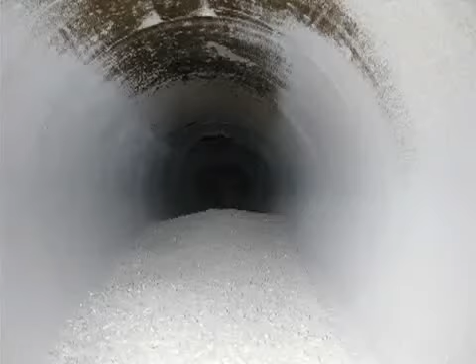Combustible dust fires and explosions continue to occur frequently, fueled by accumulations of combustible dust, which can gather over years in hidden places or in plain sight.

No company wants to see its facility blown up and destroyed and its employees killed, but they just don't understand what the hazard is. They don't realize that they have a hazard here until that one day when the explosion occurs, and it's a terrible tragedy for them. And they look back and say, if we'd only known.

When Tammy Miser got a phone call late one evening in 2003, she worried it would be about her brother, Sean Boone, who worked at an automotive parts factory. We usually didn't answer the phone that late, but we knew when it kept ringing that there was something wrong, so we answered it.

There had been an accident there before, so I knew. I knew if they were calling me, it was my brother.

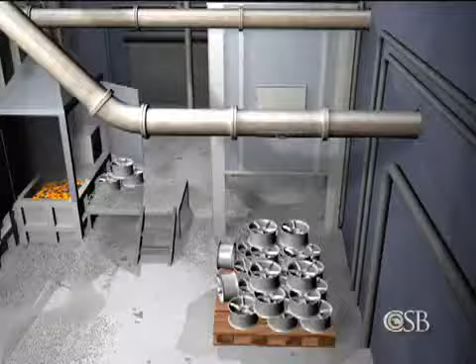Sean Boone was a mechanic at the Hayes Lemmerz plant in Huntington, Indiana. The company produced aluminum car wheels. The process of finishing the wheels left behind aluminum scraps, which were chopped into small pieces and sent to a furnace to be melted and reused.

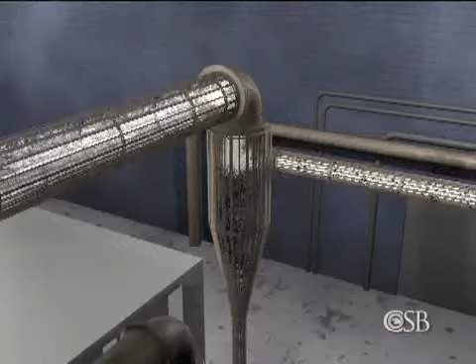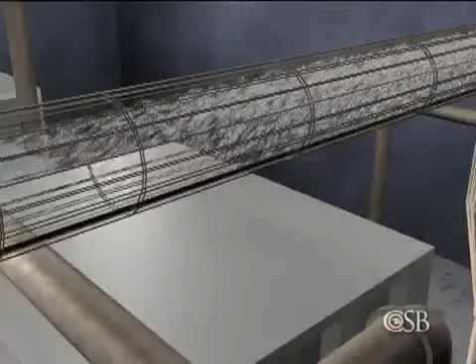Chopping, drying, and blowing the dry chips through the transfer piping created highly combustible aluminum dust, which flowed through ducting to a steel drop box outside the building, where large particles were trapped. The air then entered a dust collector, which removed finer aluminum particles. Over time, aluminum dust accumulated inside ducts.

In addition, there were leaks in the piping used to transfer aluminum chips, which caused dust to build up on surfaces throughout the furnace area. Aluminum dust landed on beams, ledges, and equipment. In some places, the dust was several inches deep.

On the night of October 29th, about 10 minutes after workers started the aluminum chip melting process, aluminum dust inside the dust collector was suddenly ignited, perhaps by a metal ember or impact spark, resulting in a large explosion.

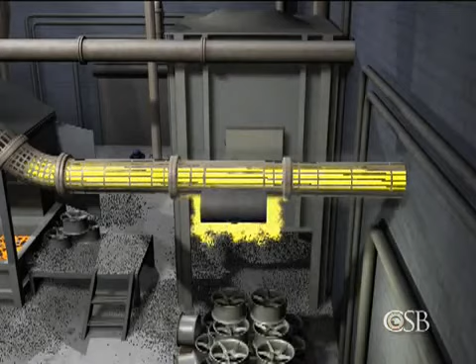The blast propagated back through the duct into the steel drop box, blowing it apart. The fireball and pressure wave continued back through the duct system into the building, gaining intensity as the accumulated aluminum dust ignited.

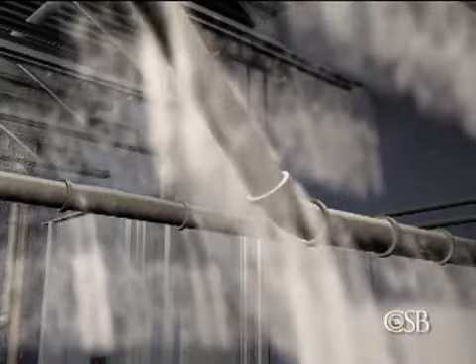The violent disturbance shook loose dust that had built up on external surfaces. At about 8:30 p.m., plant mechanic Sean Boone was one of several workers in the area of the furnace. Without warning, a fireball erupted from the furnace, engulfing the area and igniting airborne dust in a second, larger explosion. The explosion blew a 50-foot wide hole through the roof of the building.

Co-workers found Sean Boone lying on the floor near the furnace, gravely injured. He was rushed to the hospital and put on life support.

And they told us that his internal organs were burnt, and they could take his arms, and they could take his legs, but he probably wouldn't make it, and it would just prolong it, so we went ahead and took him off.

Sean Boone was one of 14 dust explosion fatalities in 2003 alone.

Launching a comprehensive investigation into the hazard, the CSB held 2 public meetings, convening panels of experts and listening to extensive public comment. First, combustible dust is a real serious problem in all of general industry.

The CSB report concluded that good engineering and safety practices to prevent dust explosions have existed for decades, but there is no comprehensive federal standard requiring adherence to those practices.

Many companies are not taking effective actions to control dust hazards. As a result, the board recommended increased regulation of dust hazards. The final report was approved at a public meeting in Washington in November 2006, and the report and recommendations were adopted.

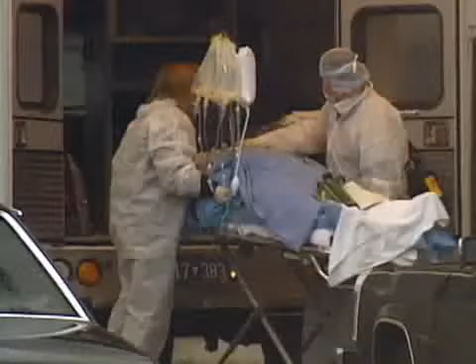Resin dust exploded at the Jahn Foundry in Springfield, Massachusetts in 1999, killing 3 workers and injuring 9 others. Rubber dust exploded at Rouse Polymerics in Vicksburg, Mississippi in 2002, leaving 5 dead. A nylon fiber explosion destroyed Malden Mills in Methuen, Massachusetts in 1995.

In fact, between 1980 and 2005, the CSB found at least 281 combustible dust fires and explosions that caused 119 deaths, 718 injuries, and major damage to industrial facilities.

Amy Beasley Spencer is a combustible dust expert at the National Fire Protection Association, or NFPA. Beyond the loss of life and the injuries, when you think about the economic impact of a dust explosion, you hear about plants being completely destroyed. There's loss of jobs. It's an economic impact on the entire community.

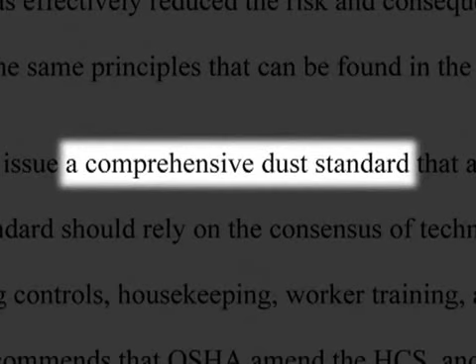The CSB report called on OSHA to establish a comprehensive regulatory standard designed to prevent dust explosions in general industry. The board said OSHA should base the new regulation on the current standards of the NFPA. These codes address hazard assessment, engineering controls, housekeeping, building design, explosion protection, operating procedures, and worker training.

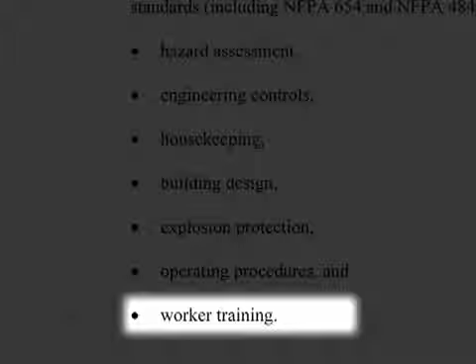The NFPA codes and standards have been in existence since the early 1920s, and there are 7 codes and standards that deal directly with dust. It's a tragedy to have even one loss of life because the technology is out there to prevent these dust explosions. In addition to the NFPA, the Center for Chemical Process Safety, as well as a leading insurance company, have developed recommended practices on controlling combustible dust.

The board also called for improved training of OSHA inspectors to recognize dust hazards. Interim CSB Executive William Wright explained the recommendation before the House Committee on Education and Labor in March 2008, citing 3 dust explosions the CSB had investigated in 2003.

State OSHA officers had inspected all 3 facilities prior to the accidents, but the dust hazards were never recognized or cited. Furthermore, the CSB determined that all 3 explosions could likely have been prevented if the facilities had implemented NFPA recommended practices.

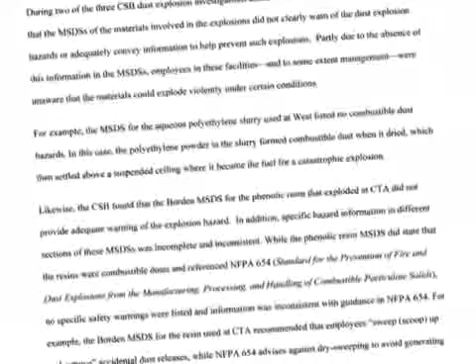In addition, the board recommended that OSHA revise its hazard communication standard to ensure that material safety data sheets better communicate dust hazards to workers.

In response to the CSB's recommendations, in 2007, OSHA increased the enforcement of existing regulations through a new national emphasis program on combustible dust. Without a comprehensive standard for combustible dust, it's difficult for businesses to know which specific NFPA provisions or other requirements they may be subjected to.

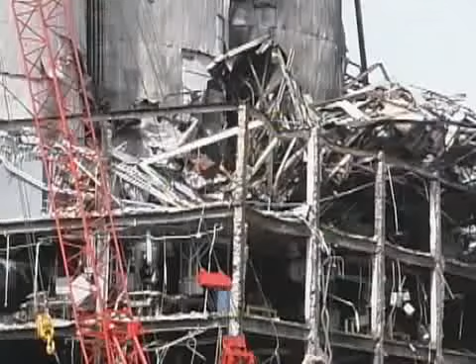The explosions tragically continue. The list includes the blast that crippled the Imperial sugar refinery outside Savannah, Georgia, in February 2008. Since 2005, about 70 additional dust explosions have been reported. In fact, the Imperial accident last month is the deadliest industrial dust explosion in the United States since 1980.

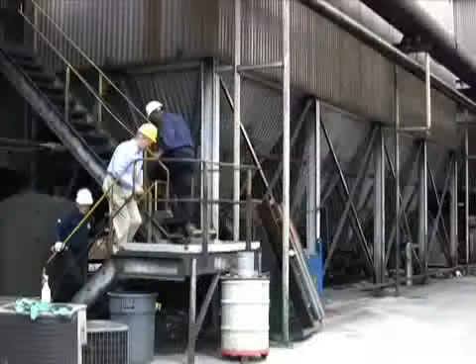CSB Chairman John Bresland: I toured the facility about 6 weeks after the explosion. The damage that was done there was catastrophic. As you walk around the facility, you think of the people who were working there that day, who were killed and severely injured. It was a difficult experience to walk around that facility. It was a very sobering experience.

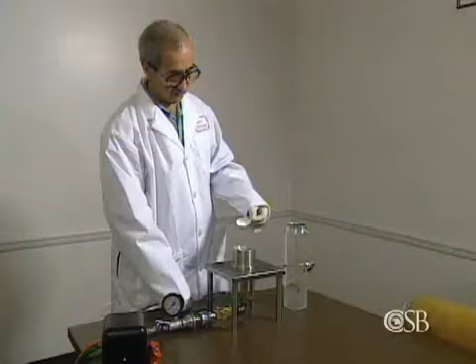What is so frustrating about dust explosions is that they're so preventable. And I believe that one of the reasons that dust explosions continue to occur may simply be a lack of understanding about the materials. Most solid organic materials will explode if the particles are small enough and they're dispersed in a sufficient concentration.

Some of the materials that could form combustible dust, and there are lots of them, could include coal, sawdust, food products like sugar and flour, pharmaceuticals, many chemicals, and even many metals. Like all fires, a dust fire requires fuel, oxygen, and an ignition source. A dust explosion requires two additional elements: dispersion and confinement.

The CSB commissioned laboratory tests using a sample of fine polyethylene dust found by investigators in the rubble of a North Carolina factory. Dust is dispersed into a flame, creating a fireball.

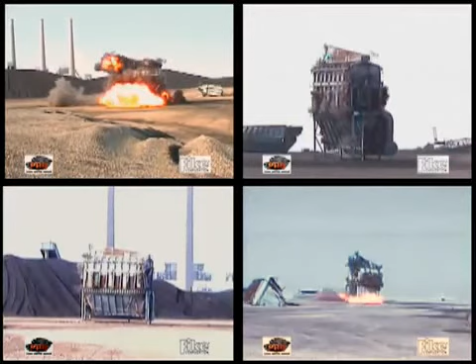When the dust is confined within a structure or a piece of equipment, a powerful explosion can occur and propagate, as this coal industry video demonstrates.

Dust may accumulate on surfaces and lie undisturbed for years. Then some initial fire or explosion, known as a primary event, shakes it loose and ignites it. It causes a pressure wave to go through the plant, and that dislodges all of the dust that is perhaps unknown up on the rafters, on the beams, on the tops of equipment, and that serves as the fuel for the secondary explosions that move through the plant. Most of the fatalities and the devastating injuries have been caused by these secondary dust explosions.

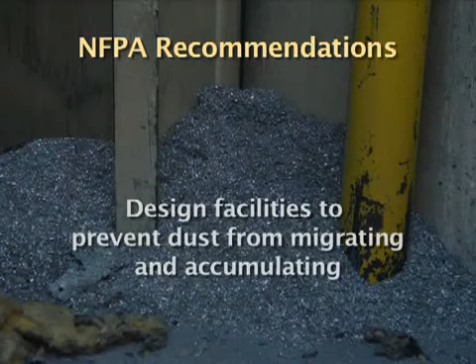According to the NFPA, a catastrophic explosion can occur from as little as 1/32 of an inch of accumulated dust, around the thickness of a dime, covering just 5% of a room's surface area. The NFPA therefore recommends that companies control fugitive dust emissions, design facilities to prevent dust from migrating and accumulating, and perform rigorous housekeeping to remove any dust that does build up.

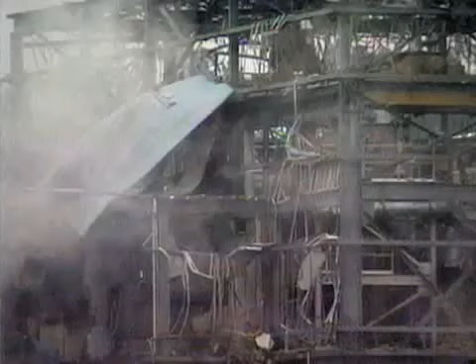The NFPA codes have been adopted either at the state level or in some cases at the local level, at the city level. But the problem is they're not enforced in any regular way.

A catastrophic dust explosion at the West Pharmaceutical plant in Kinston, North Carolina in 2003 reveals what can happen when companies do not properly assess the hazards from combustible powders and do not design their buildings and equipment appropriately.

West Pharmaceutical made small rubber medical products, such as syringe plungers and stoppers, at a large manufacturing facility with nearly 300 workers. In the process, large batches of rubber were compounded and rolled into long strips.

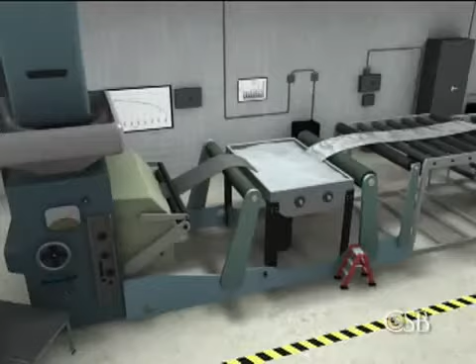To keep these strips from sticking together, they were dipped in a vat containing a whitish slurry of water and finely powdered polyethylene, a petroleum-based wax-like plastic. The coated rubber strips were then blown dry with fans and folded for later processing.

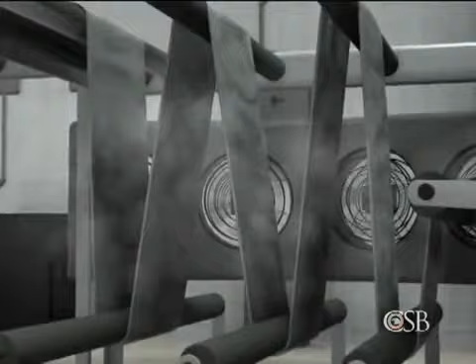As the rubber sheets dried, combustible polyethylene dust, which was not visible to workers but is colored white here for illustration, was blown into the air.

Over the years, the air conditioning system drew polyethylene dust into the hidden space above an acoustic tile ceiling that was suspended over the production area. There, the dust gradually built up to a thickness of up to 1/2 inch on ceiling tiles, beams, conduits, and light fixtures, just a few feet over the heads of unsuspecting workers.

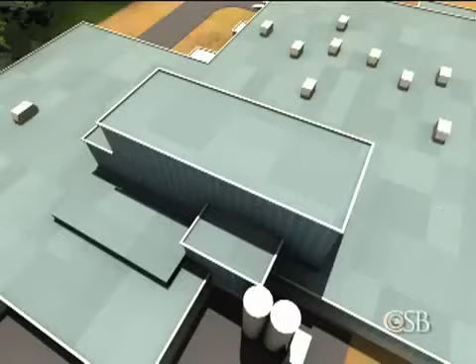January 29th began as a routine workday at the West plant. But at about 1:28 p.m., a small fire or explosion occurred somewhere near the production area.

It lofted the accumulated dust above the ceiling into a thick cloud, which then ignited in a much more violent secondary explosion.

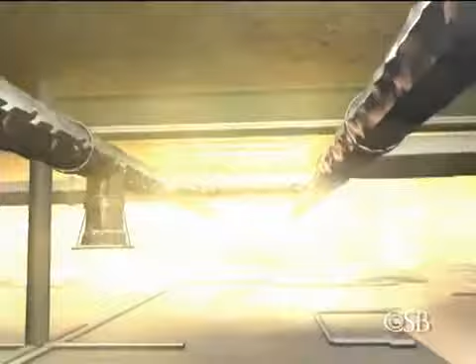Some employees described a sound like rolling thunder as the dust explosion spread throughout the space above the ceiling and ripped through the building. The accident at West Pharmaceutical Services took the lives of 6 employees and injured 38 others, including 2 firefighters.

The thing that set up the tragedy at West was the mere accumulation of hazardous dust above a ceiling. The NFPA code says that any openings where dust could accumulate must be sealed. The solution would have been to either seal it or to not have a suspended ceiling.

Another cause of the West accident was that workers were not informed of the dust explosion hazard arising from the polyethylene slurry, a fact that should have been included on the material safety data sheet.

At West Pharmaceutical, the dust wasn't well recognized as a hazard because it was actually in a slurry form. So the actual processing of the slurry, the drying of it, created the dust, and the dust migrated above the suspended ceiling. Cleaning above the ceiling was overlooked in West's otherwise rigorous housekeeping program.

Cleanliness was a matter of pride for the West staff. Being in the pharmaceutical services industry, they kept the production area very, very clean.

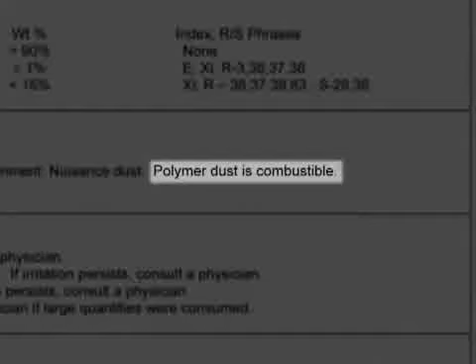The CSB found that the problem of inadequate MSDSs is widespread. Of 140 MSDSs for combustible powders, the CSB found that very few included adequate dust explosion warnings or referred readers to the appropriate NFPA standards. There needs to be better communication to workers on the issue of combustible dusts, and that should be done through improved information on material safety data sheets.

Less than a month after the West Pharmaceutical accident, a fatal dust explosion crippled the CTA Acoustics plant in Corbin, Kentucky. The disaster at CTA, which claimed 7 lives, illustrates the critical importance of following NFPA recommended practices to control dust hazards.

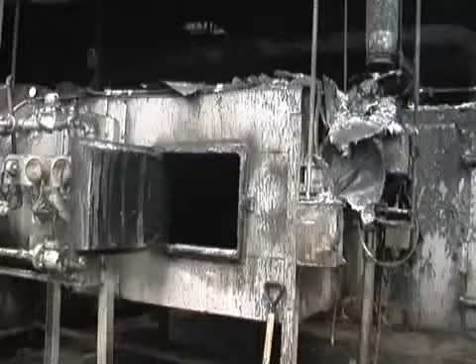The CTA facility, with more than 500 personnel, produced fiberglass acoustic insulation for automobiles. Covering 300,000 square feet, it had 5 production lines. At line 405, fiberglass was fed along a conveyor system and spread to create a web.

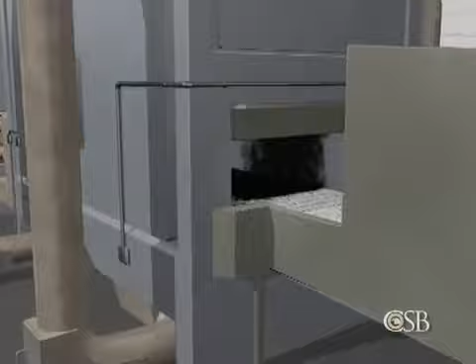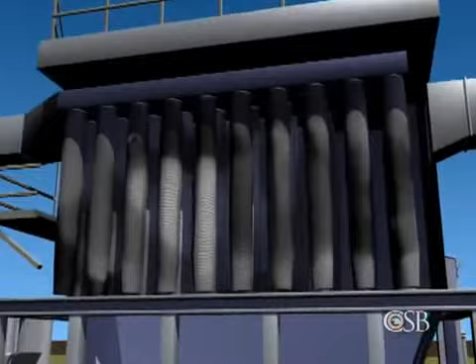Black phenolic resin powder was deposited onto the fiberglass. Hundreds of thousands of pounds of the combustible resin powder were used in the plant every month. Next, the mat former used air suction to spread the resin through the fiberglass. Excess powder and fibers were drawn up into a dust collector and rapidly accumulated on long cloth bags. After the mat former, a nylon facing was rolled onto the fiberglass before it entered a gas-heated curing oven.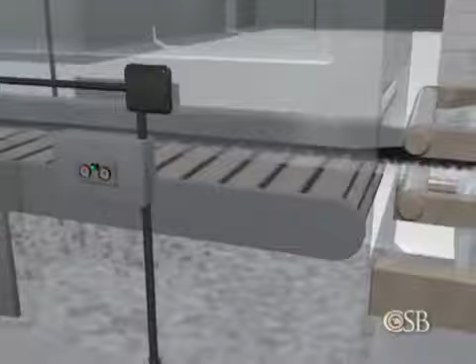Combustible resin accumulated in the oven, resulting in frequent small fires that were extinguished by workers. During each shift, the line was shut down for cleaning.

On the roof, employees routinely used compressed air to dislodge dust that had built up in the ductwork, dumping the material into a large open box on the production floor.

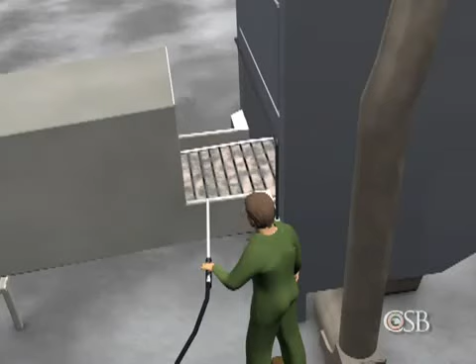On the production line, workers also used compressed air to blow dust off equipment. They swept the production floor with brooms. These cleaning activities created dust clouds so dense that large fans were used to blow the dust away from the operators. This increased the dispersion of dust in the plant.

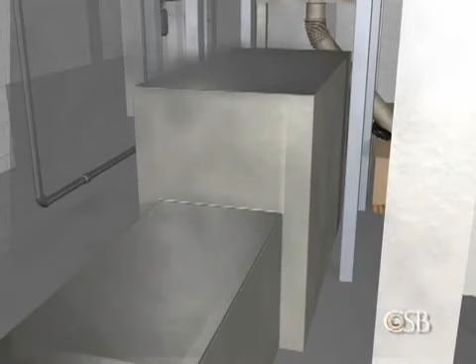The dust settled on horizontal surfaces throughout the entire production area. Over years of operation, dust built up on top of pipes, electrical conduits, and other hard-to-clean elevated surfaces such as roof trusses. A pile of resin dust more than a foot deep had built up on top of the blend room due to periodic cleaning of clogged equipment.

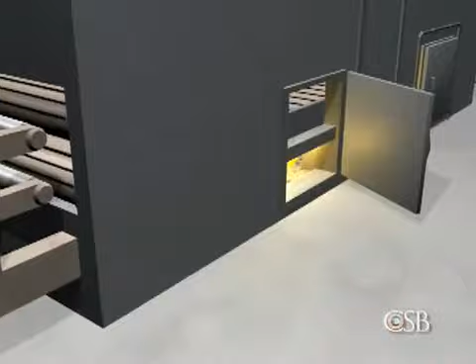On the morning of February 20th, 2003, production line 405 was shut down for routine cleaning. The oven was still on, with one of its doors left open to control the temperature because the oven thermostat had broken weeks earlier. CSB investigators later determined that most likely a small fire, unseen by workers, had started inside the oven, fueled by a buildup of combustible resin.

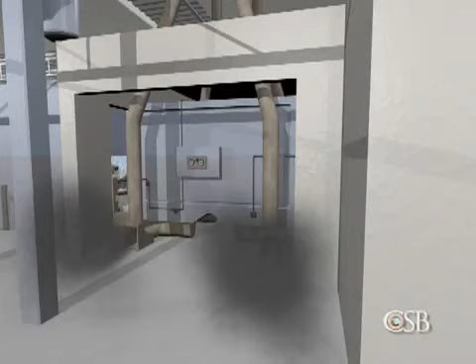During cleaning, workers had discovered that a transition duct leading from the mat former to the dust collector was clogged. They used a compressed air lance to dislodge the material back through cleanout doors into the production area. Together with other cleaning activities, this created a dense dust cloud around line 405. A wall fan blew the cloud toward the open oven.

The dust was ignited by the small fire inside. Flames erupted from the oven, igniting the larger dust cloud, which exploded. This was quickly followed by a second dust explosion at the other end of the production line.

4 employees nearby were injured. 1 later died from severe burns. The force of the 2 explosions shook the building and dispersed accumulated dust throughout the production area.

This airborne dust fueled a quickly moving fireball, spreading west along the roof trusses toward production line 403, which was also surrounded by dust. 4 workers in this area were fatally burned. The fireball continued past line 402, fatally injuring 2 more workers, and then to line 401, where a third explosion occurred nearly 300 feet from where the first blast was ignited. 3 workers in this area were severely burned.

The 4 production lines were not adequately segregated, and this allowed the dust explosion to very quickly travel from one production line to the next to the next. And in this case, most of the employees who died were actually working a far distance from where the initial fire began.

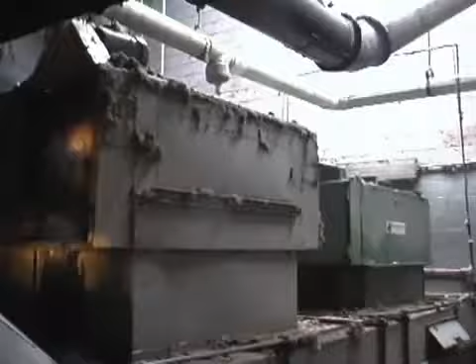NFPA recommends minimizing horizontal surfaces where dust can collect, but the CSB found that this was not done at CTA. At CTA Acoustics, there were many actions being completed that were prohibited in the NFPA codes and standards.

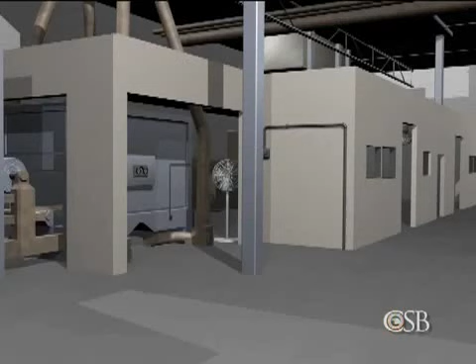For instance, if you're using compressed air, that can create more dust in the air to cause a larger fuel load for the actual explosion. CTA personnel also used brooms and fans to clean the production lines, which dispersed dust throughout the building. NFPA standards emphasize the use of safe cleaning methods, such as vacuuming with specialized equipment.

Well, in normal, routine, daily housekeeping, workers address the working and walking surfaces in their production areas. They address their equipment, the places that they can see. But when it comes to preventing dust explosions, much more is needed. You have to clean in the out-of-the-way places, up near the rafters.

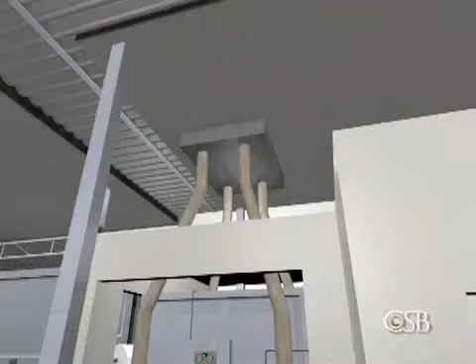You also don't want to over-rely on housekeeping, because if you have housekeeping round the clock and you're still seeing layers of dust, you might want to look at your system to see why that dust is being produced in the first place. The CSB also found the material safety data sheets for the phenolic resin powder used at CTA

did not adequately warn of the dust explosion hazard. Kentucky State Fire Inspectors had not visited the facility since its construction in 1972. Insurance companies had inspected the plant on multiple occasions, but never identified the dust hazard.

Neither had state authorities. We found that Kentucky OSHA had, in fact, inspected this facility not long before the explosion, yet they had not uncovered the combustible dust hazard. We further learned that they had not received specific training to be able to detect this deadly hazard.

Following the CSB investigation, Kentucky officials established a new program to inspect facilities with dust hazards and developed an educational bulletin on dust, which was distributed to thousands of facilities.

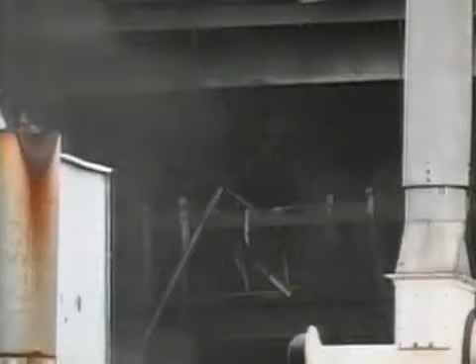Why do these accidents keep occurring is the age-old question. The knowledge is out there to make sure that no deaths occur due to dust explosions. I think the big problem with combustible dust is that we underestimate its hazards. We become complacent and we fail to take the necessary precautions.

But it's not going to happen in my plant, because it never happened that way before. I mean, we've been operating for 40 years and never had a problem. That kind of logic is one that can guarantee you to get into trouble.

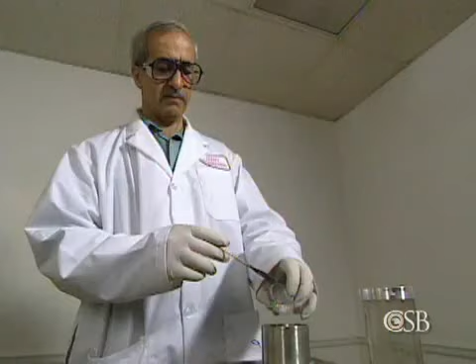Any material that they have in their process in a dust form should be tested to determine if it is a dust explosion potential or not.

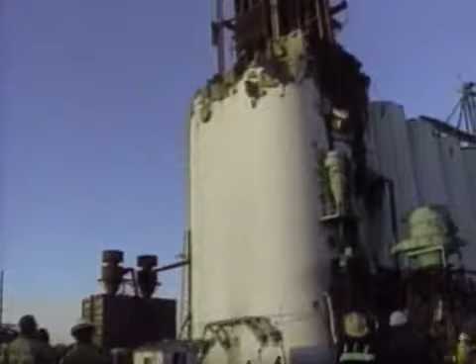In the 1970s and 80s, the U.S. experienced a series of grain dust explosions that killed many people. OSHA responded with new regulations in 1987 requiring preventive maintenance, worker training, and formal dust cleaning programs in grain handling facilities. A 2003 OSHA analysis concluded that the number of deaths from grain dust explosions had dropped dramatically.

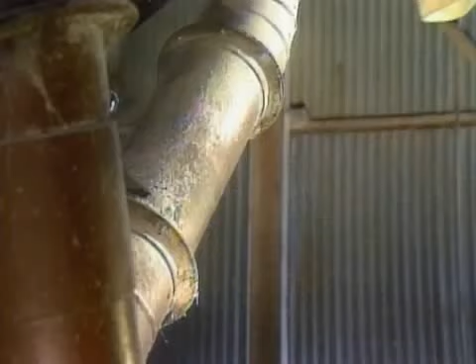OSHA has a specific standard for grain dust, and that's been a very successful standard, and it has significantly reduced the number of accidents involving grain dust. I believe if there were a national OSHA requirement dealing with dust explosions, that the incidents would be significantly decreased.

In April 2009, Secretary of Labor Hilda Solis announced plans for a comprehensive regulatory standard. Where workers are in danger, where mandatory regulations make sense, we will act and we will implement. And I'm announcing today that OSHA will begin the rulemaking on combustible dust.

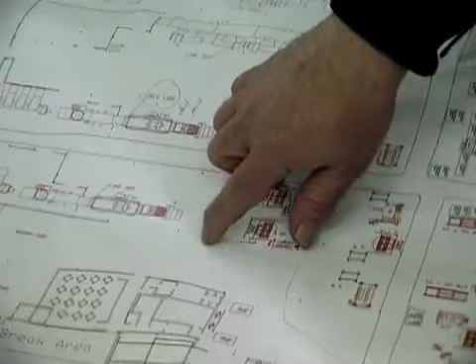What I feel that we need to do to prevent combustible dust explosions is threefold. We need education, we need industry to understand what the hazards are. We need regulation, we need a comprehensive combustible dust regulation, and we need enforcement of the regulation. And I feel if we do all three, we'll go a long way to preventing these terrible tragedies that we're seeing with combustible dust explosions.

The only way to keep my brother from dying in vain would be to make changes. And if there's not a change made, well, then it's going to happen again. I hope that people who watch this video will take the lesson that they really need to do something to prevent combustible dust explosions. For more information on combustible dust, please visit csb.gov.